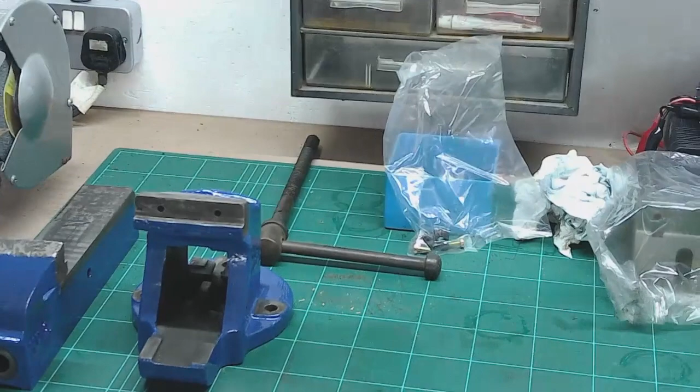So that's that. In other news, what I've been up to this week - the vise that you saw me strip into bits last week, that's now had 2 coats of the blue paint, so that's all ready to be reassembled really, other than I've still got to do something with the main screw and the shaft.

That just needs a bit of a wire brush and a clean up. So I might include some of that in this week's video in terms of just the rebuilding of that. I'm just leaving that at the moment because I want to get the second bench built first before I reassemble the vise, because as soon as I've got it reassembled I want to bolt it to the new bench.

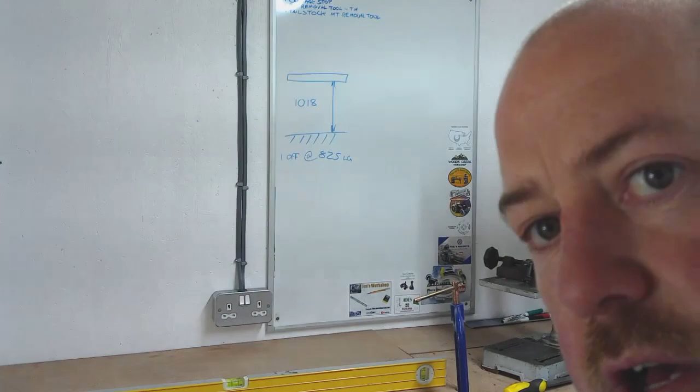I've taken some rough measurements on the board there that I'm working to, so we're ready to start that in a moment. So that's kind of updates of where we're at.

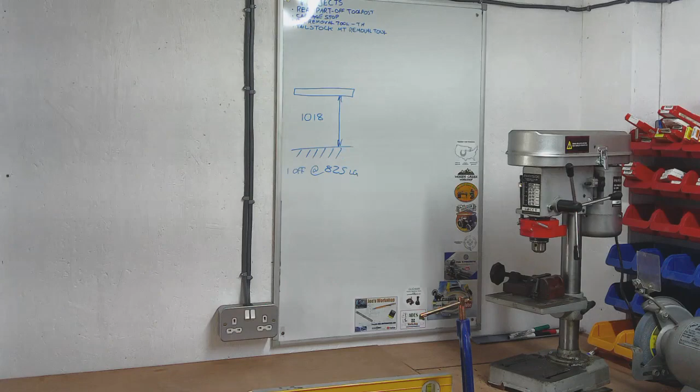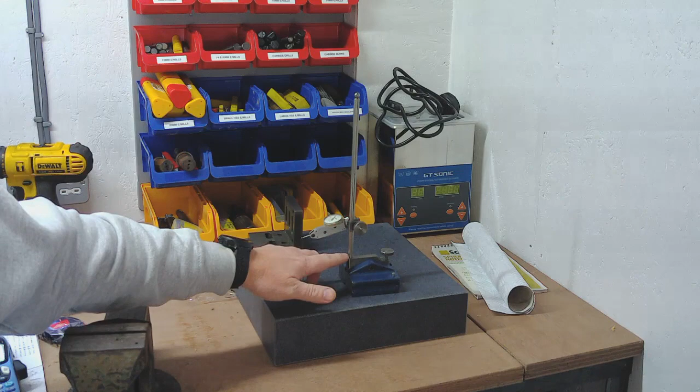The DTI stand or scribing block on the surface plate, I've actually fixed that, and I really wish I'd filmed it because it went incredibly well. It's a very simple job really, but basically I cut the end off the bar that was slack. I measured up the hole, it's pretty much 1/4 inch. It was slightly under, so I got a 1/4 inch reamer and just ran a reamer through, just by hand, a hand reamer. It took very little scraping out really, but it just sized it at 1/4 inch.

And then I've turned a 1/4 inch diameter on the bottom of the leg once I parted off the old piece that was undersized, and that's now a really good fit, really tight fit, but I can take it apart if I want to. And I've done some tests with the clock just on the top of this angle plate that I've got sitting on the surface plate here, and it's very good actually - very stable in both directions, so that tells me the joint's good. So that's all operational now, so I've got that to use.

I'll just spin you around and we'll go and have a quick look at the engraving machine, the work that I've been doing on that, and one of the issues I've come across with it, and some future plans with the engraving machine.

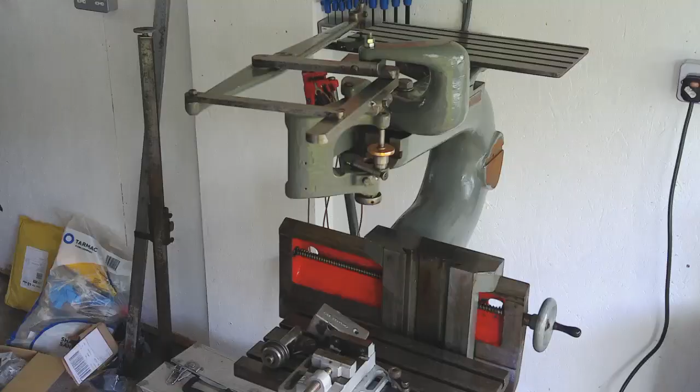Okay, so we're here at the Taylor Hobson. You'll see, hopefully it looks a lot cleaner than it did on previous videos. So I've been through and just given it a good wipe over, general wipe over all over it, taking off all of the old duck oil that actually looked like rust. I thought it was very rusty, but it was just brown duck oil basically where it had dried out, and the duck oil had done a really good job.

Once I'd wiped that off with a bit of degreaser, the actual steel surfaces underneath were very clean. So I've wiped all of the slideways, re-oiled them, got everything moving again, so it's all very, very nice, very easy to move. Sorry you can't see that, I'll move this one instead. So you can see there it's not taking a lot of force to move that.

It's all very smooth, and a lot of that's because of the work I did 4 or 5 years ago when I first bought this and completely stripped it, cleaned everything right up, did some stone work on the slideways. I didn't do any scraping, just generally gave it a really good thorough going over, then rebuilt it and repainted it, and it's in good condition.

One job I did have to do - I've never really used this thing, I cleaned it up and rebuilt it, but never used it in anger. I thought, now I've got it to this point and some room to move around it, we'll get it fixed up. So I got the rope attached to the motor and to the spindle, and we got it powered up.

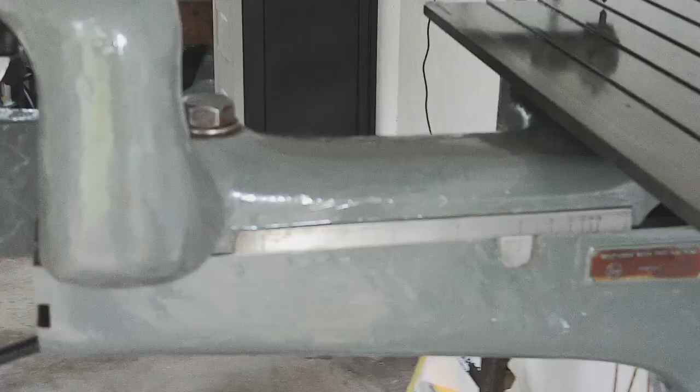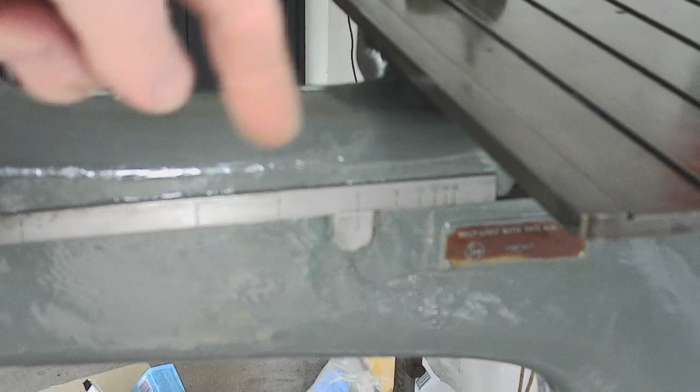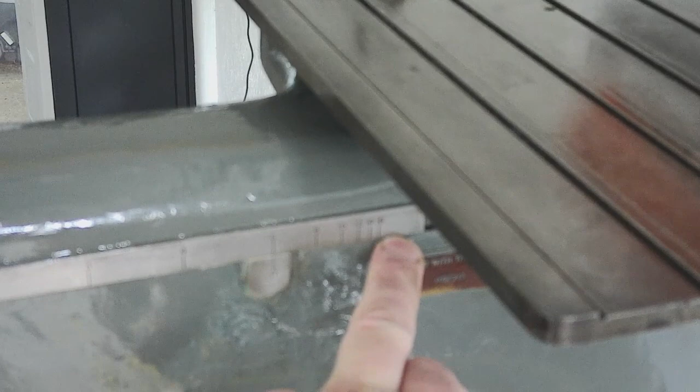You can see there the whole head unit will move backwards and forwards on the base casting, and you can just about see on here there's a series of markings, running from 2, 3, 4, and I think it goes 6, 8, 10, 12, 14, 16 - that's your ratio between what you've got on the copy plate up top and what you actually produce with the spindle and the cutter. So you set this to your desired ratio, and at the moment that's set on 6.

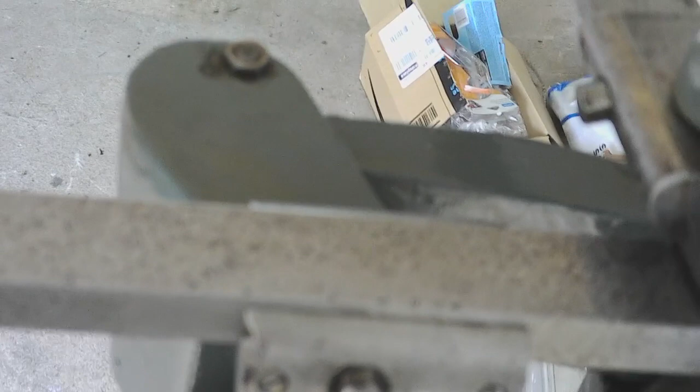You then set one of these bars on the parallelogram piece - there's a series of settings along here that have the same numbers on, so 2, 3, 4, 6, 8, 10, 12. You basically set the front edge of this piece to the same number that you've set on there, and then on the second arm of the parallelogram, this top one here, you have another set of the same numbers again.

Now you can generally see the state of this top bar, it's had much more corrosion. I would imagine at some point this has been stood where it's had water and moisture on top of it, and I really couldn't see any markings on there at all.

I really struggled, so I took it all apart, took it to the bench, got a magnifying glass out, and really went over it very carefully, and gradually, with a bit of Scotch-Brite and a lot of staring at it, I managed to suddenly see the numbers start to appear, and I could see where they were laid out. So what I've now done, and it's a bit rough and ready, and again the camera won't pick it up at all, I doubt - let me just turn the lights on at this end of the shop and see if that helps.

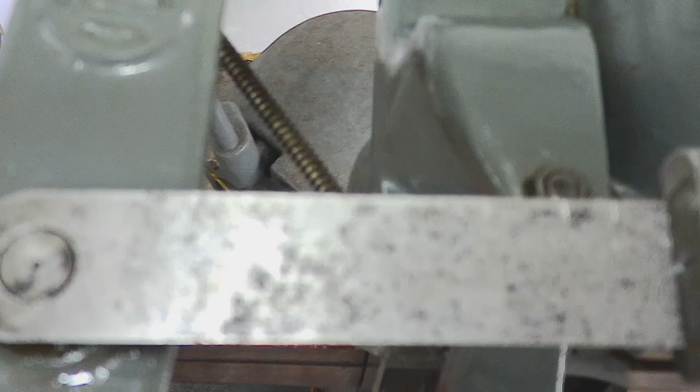It's probably going to make it worse actually, because there'll be a lot more reflection.

Anyway, what I've done is I've gone down, marked with a marker pen where the lines were, and actually gone in and scribed a line using my little Dremel and a burr. Then I got my stamp set out, went in next to the lines, and stamped all the numbers on that top plate, then given it a stone over to get rid of any high, raised edges. So now I can set it all up correctly.

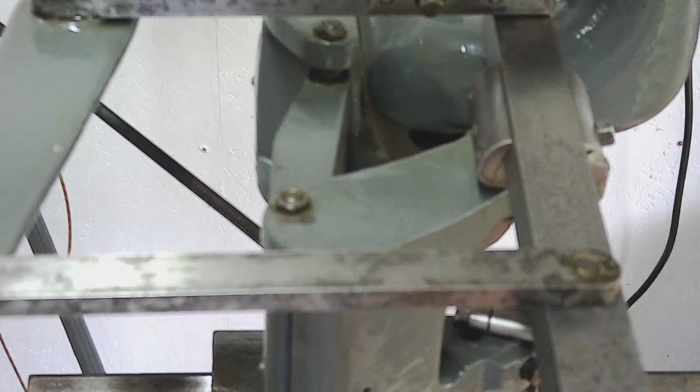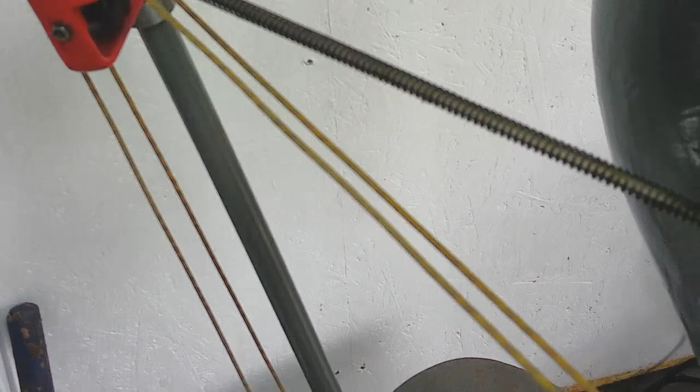So we set it all up, and you can see there, this is the rope that drives the spindle. This is where, when you pull this, it goes under the spring tension that keeps the rope tight so that it drives.

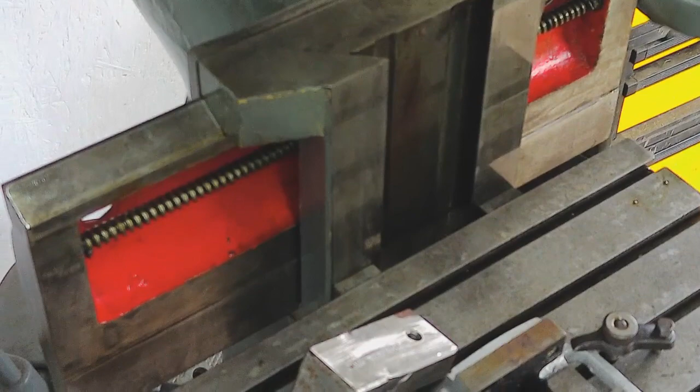So I got it all set up and just had a bit of a play. This is just a bit of a lump of steel that I found, and my camera's just not going to focus on that, but it actually says John's Workshop on it, just me having a play with the machine. The engraving's not very good at all, it's not regular, it just doesn't look neat or tidy. So I started investigating further, and I took the spindle unit out.

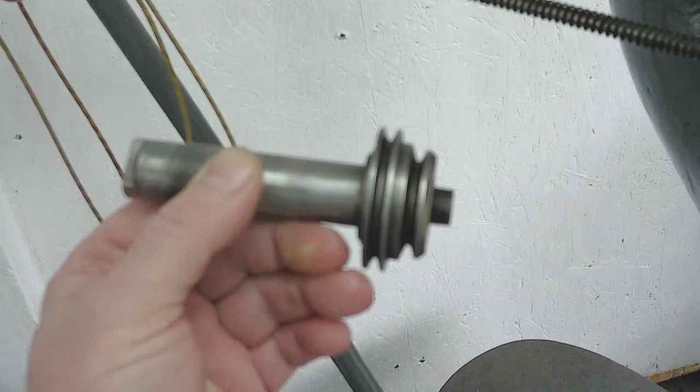So this is the Taylor, this is a Taylor Hobson unit, and basically your rope runs over the pulleys there. There's two pulleys, so you've got two speed options.

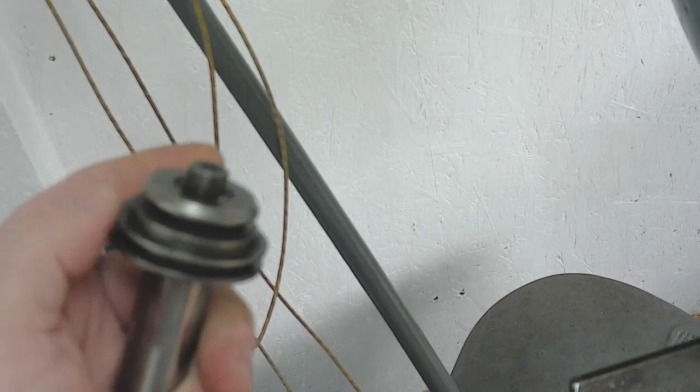But what was immediately apparent once I took this out, I managed to extract the bit that had been in there for a long time. So we got that out. But this thing's just rumbling and crunching and grinding, it's just the slack in it, and it's past its best. In fact, it's no good, it's no good for the machine.

So I've got a real issue now, because you can't buy these things anymore, or to the best of my research, I'm struggling to find anything. There's the odd one or two on eBay every now and again, but they're probably in a similar state to this. They're 60, 70 years old, these things.

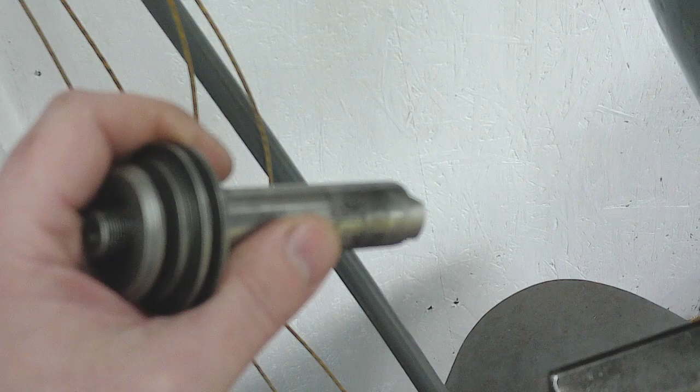I'm really not sure what to do. There is a refurb service, and I've looked at the cost of having one of these things sent away and refurbed, and it's about 3 times the price of what I paid for the whole machine. So it doesn't make financial sense really to spend that sort of money at the moment, especially because I don't really plan using this thing very often.

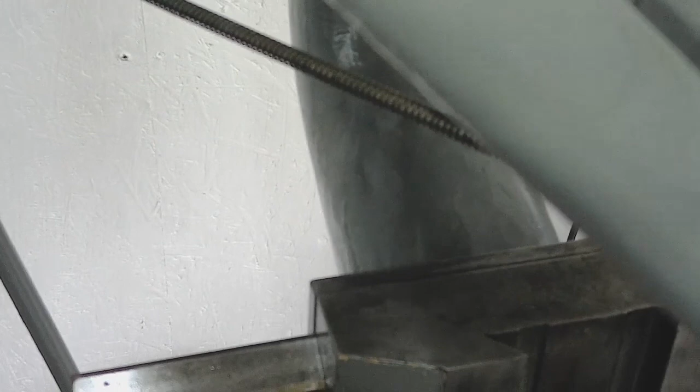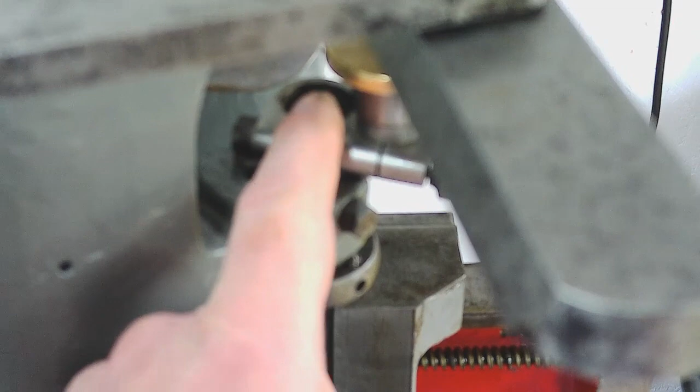So it's all kind of at a standstill at the moment. But my thinking is - apologies for the handheld - if you look just here, this bore here is where that spindle sits. It sits in through the bottom up there. So what I may do is turn a diameter eventually that's a good fit in here.

It's just a plain bit of bar that will just sit in there nicely, but I'll turn it longer so it sticks out the top by about 30mm, whatever, and out the bottom by a similar distance, and then create 2 brackets. Once I've got the mill, I'll be able to do that much better, move off to the back, so I've got a bore the size of this spindle diameter, and then another bore further back, as close to the head unit as I can get it, then bore this second bore out on both plates to hold a DC motor or something similar.

You can buy them online for engraving machines, basically a DC motor with an ER11 front end on it with collets. That's my kind of thinking. That's all doable, it would make a decent project as well to film, and it's probably the cheapest way of me putting this unit back to a condition where I can use it and get over the issue that I've got with the worn out spindle unit.

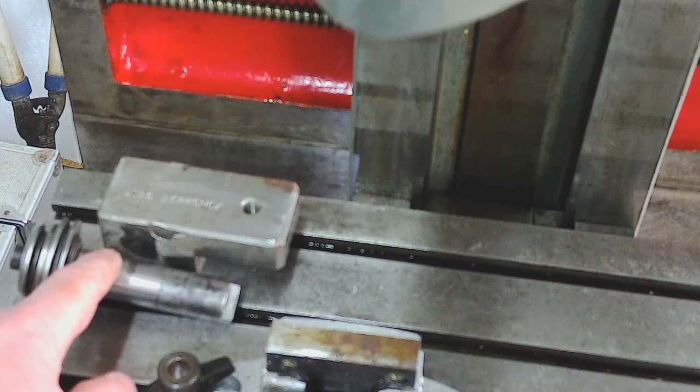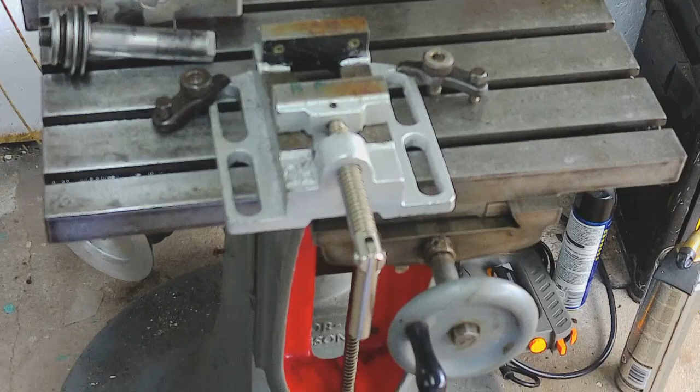So that's just a bit of an update really, guys, of what I've been doing. But it's nice to see the whole machine looking decent again. I've still got the bottom end to clean up, but that's just superficial, it's the paintwork on the outside. All of the slideways and steel work and everything's all nice and clean.

So that's a bit of an update on the engraving machine. You'll probably have seen at the back there, I've put my Allen key sets up on the wall. So gradually it's still starting to unpack things and get them screwed up onto the wall. So I'll leave it at that point now, and I'll probably bring you back with a time lapse as we're finishing the bench off.

One more quick update, guys. I've dragged out of the shed next door my pallet truck, from under boxes and various other things.

So that's sitting in here ready to go for when the mill arrives, just to get the thing into the garage, and then may end up having to use this in some form or another as part of the lifts. We'll see how we get on with the crane, but there might be bits of the build where I need some hydraulic lifting, and obviously the pallet truck can be used for that.

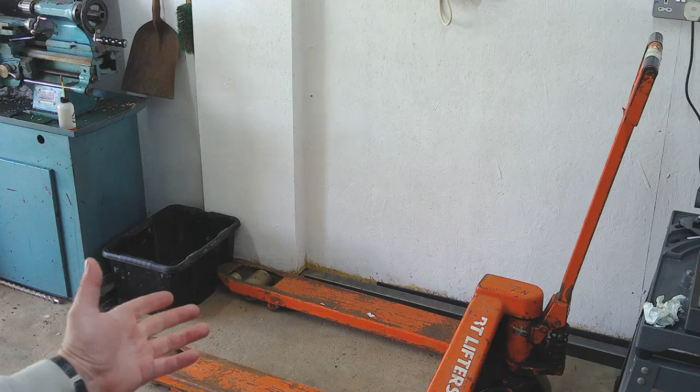So I'm going to need some big lumps of timber, and I've got some breeze blocks and various other things that we'll be able to use to pack up on top of the tines, and gradually start lifting things up. We may need to do it that way, or I may be able to use the crane. All of that will become evident once we get everything in and I start planning the build.

So that's in here ready to go, just in case when it's delivered it's pouring with rain. I'm ready to go now. We can just get the door open, get this thing outside, get underneath it, wheel it into the shop at least so it's out of the weather, and then at that point I'll do everything else on video and bring you along on that journey.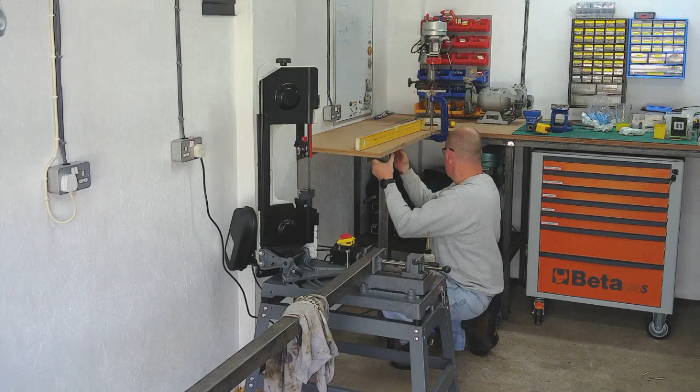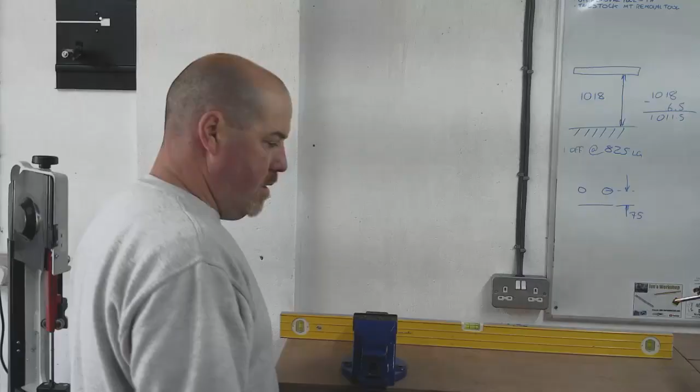Right guys, well I'm back, I've just cut the steelwork off, roughly positioned it in place. I think this is where it's going to go. I'm just going to go for the one steel leg, which you can't see, apologies. Let me just pan down a bit so you can see what I'm doing.

There you go. So there's one steel leg, 50 by 50 box section. Underneath there, running the full length of the bench, is a piece of angle iron that sits just on top of the 50 by 50 box. And then right down at the floor, and it's only loosely kicked in at the minute, is another piece of angle iron there. So it's all at the right height. The bench is level at that, so I'm happy with that.

What I'm going to do is put the angle iron back, and I don't know whether you saw in the slow motion, I just took a measurement at the bottom there of 75mm from the front of the bench in to where the holes for the vise will need to go. So I'm going to pre-drill two holes in the angle iron under here at the hole centres for the vise, and then I'm going to weld all of this together.

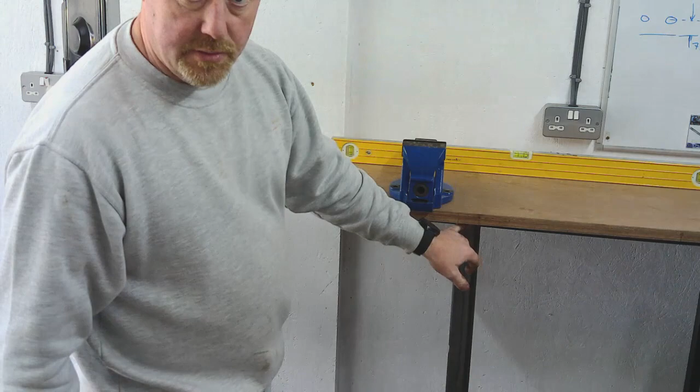So I'm going to weld the box section to the angle iron, and weld the angle iron piece at the bottom there to the bottom, centrally about the box section. I'll pre-drill two holes in the bottom piece of angle iron as well, so I can bolt that to the floor. The idea being that when I bolt this vise to the bench, it bolts through the vise, through the timber, and through the angle iron piece underneath as well, just as a bit of extra. It won't need it because this bench top's very robust anyway, but it will just mean everything's really solid. So that's the plan.

That's where the vise is going to go, and then I'll have the grinder sitting on here as well, and if there's room I might even pull the pillar drill round onto this portion of the bench as well. We'll see. So that's the plan.

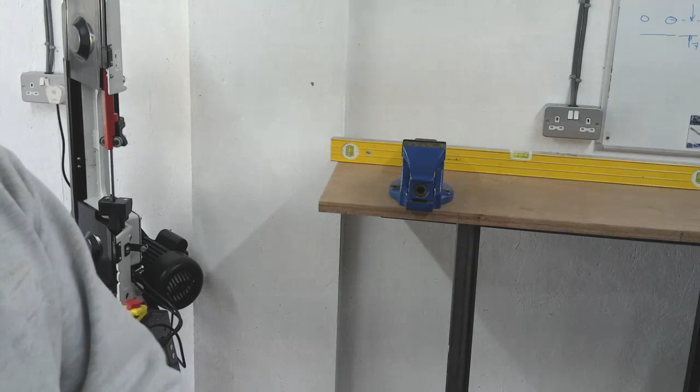And then what I'll finally do when I've got everything together, right underneath the main bench, in this corner where I've got the clamp at the minute, I'll weld the angle iron piece so that's butted up to the angle iron of the main bench, and I'll just weld that angle iron to the main bench framework under there, and then that will make a very rigid addition to the bench.

So I'm just going to stick the camera back on charge. It's about out of battery now, but hopefully from where it's charging I'll stick it onto a time lapse, and you'll be able to follow along with what I'm doing.

Just a quick tip, guys, for anybody who doesn't know, for a situation like this I need to know what the hole centres are for the vise, to drill the holes through the steelwork that's going to go under the bench. These holes are fairly irregular, they're cast holes, not round holes. There's many different ways to get hole centres by different methods.

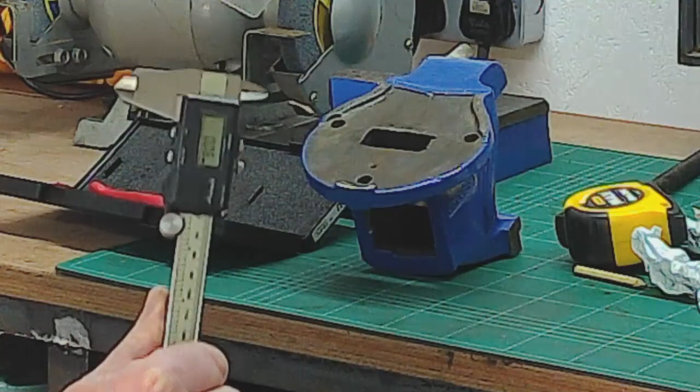But when the holes are irregular like they are in this, the best way I've always found to do it is very simple. You need a vernier, and you use both sides of it, the inside and outside versions. So the easiest way is just to measure your extremities until you get your biggest result, and we've got 121.3.

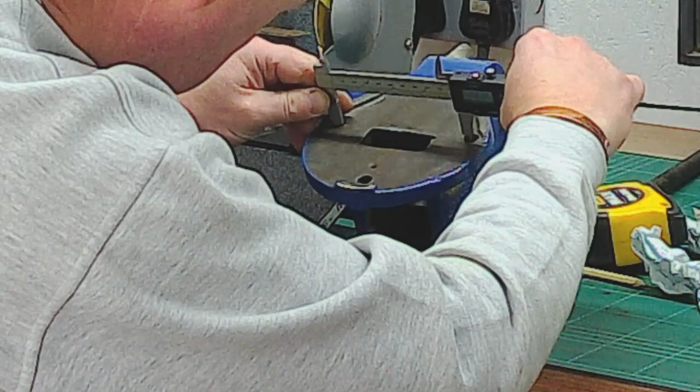So I'm just going to write that on the whiteboard, which you won't be able to see, and then you measure the smallest dimension, 98.75. Okay, I'll just go up to the whiteboard, bear with me a minute.

Okay, so take two of the measurements. We're just going to add these two numbers together now. So I've written down the widest and the narrowest points, just going to add those together. Apologies you can't see: 7 and 3 is 10, 8 and 1 is 9 and 1 is 10, 9 and 2 is 11 and 1 is 12, and 2. So we've got 220.05.

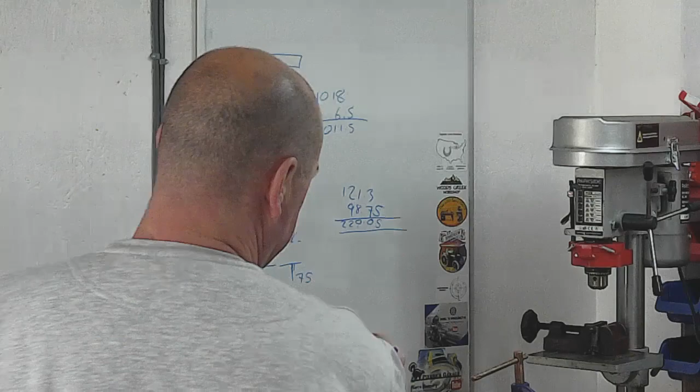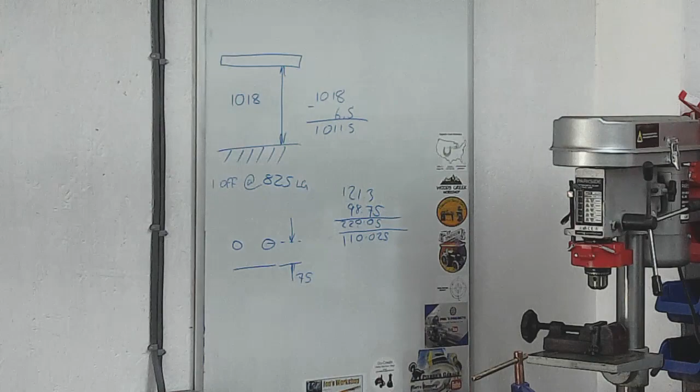And then you divide that value by 2, which is going to give us 110.025. We'll ignore the 0.025 based on the hole sizes, so it's 110mm hole centres.

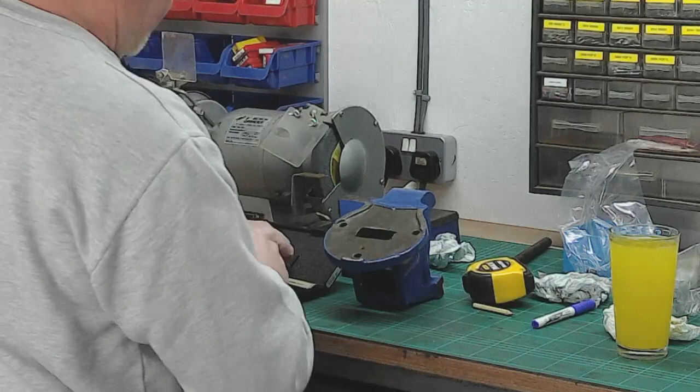So I'm just going to flip back to the device, and we'll just double check that with the vernier. So it's 110mm, so if we set that to 110, and that's bang on. So that's an easy way, a very simple way, especially when you've got irregular shaped holes like cast holes that aren't perfectly round.

That's the easiest and best way of determining the hole centres. So I'll use that value to mark out the steelwork now, and I can drill the holes in the steelwork to accept the bolts underneath the bench.

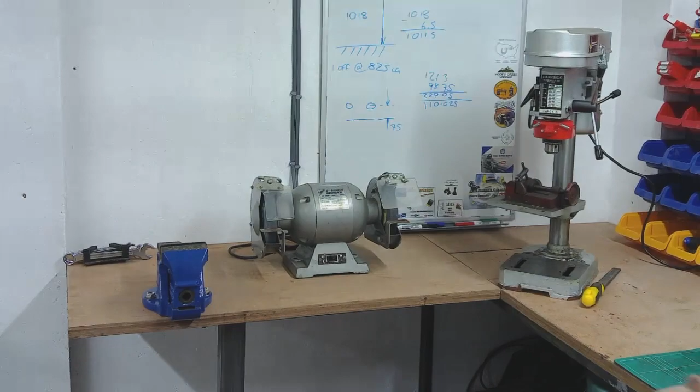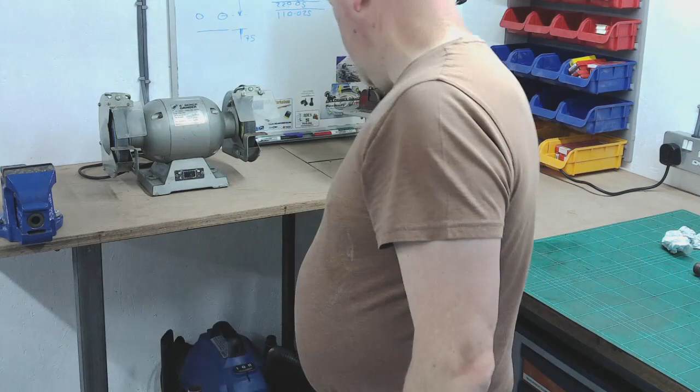It's absolutely solid, which is what I wanted. Space underneath for the shop vac, so I finally found a space for that to go, so that's sitting underneath the bench there now. The pillars are bolted to the floor, so that's solid, and the beam underneath is welded to the bench, and I think I did a bit of time lapse of that as I was welding.

So I've just loosely thrown the vise together, and tomorrow I shall come out, rebuild the vise fully, and also finish off the lathe tailstock Morse Taper attachment. So what I did off camera, and I did this in the week, I'll show you the bits and pieces. There's this piece of mild steel, black mild steel with a tiny hole in each end, that's for a split pin.

The idea behind that came with the saw, and that was the axle for the wheels to run on, which I'm never going to use. So we're going to cut this down to a shorter length.

I've made this adapter, which is just a piece of unknownium. It was quite hard stuff, I don't know what it was, but it's just something I got in the scrapping. I've drilled a clearance hole for a 5mm bolt straight through it. I've counterbored for a 5mm cap head at one end, and at the other end I've bored it out 10mm, which is the diameter of this bar.

So that'll sit on there, it'll need threading in the end of here, and the cap head will then go through and attach to there. That flat face on the top there, this diameter has been turned to fit just down the bore of the tailstock, so it's a good fit in the tailstock. So this flat face here is the face that will do the hammering on the back of the Morse Taper to eject it.

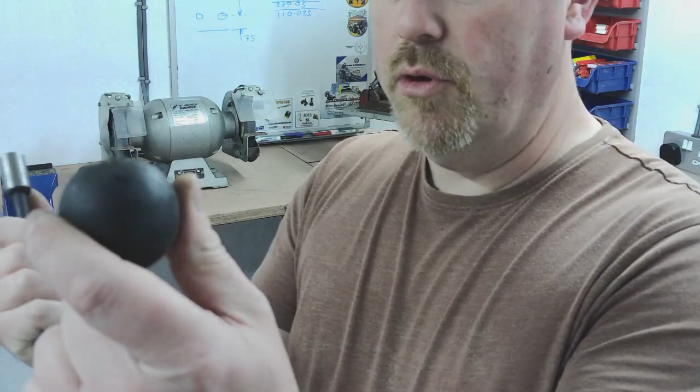And then at the other end I shall cut it to the right length, and I've got a black rubber ball that was part of the engraving machine that's never going to get used. So again, at that end, what I shall do is sink that cap head properly into the ball.

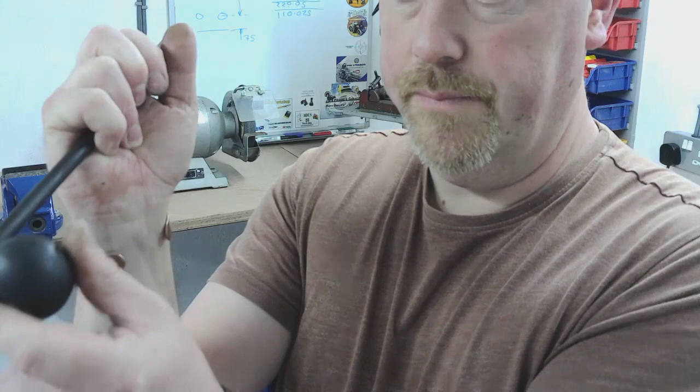And then at the other end I shall bore that out 10mm, and I shall drill and tap the other end of this black piece of bar at the right length, and screw the ball on at that end, and then I shall have something that's nice to hold in the hand, and that will slide up the back of the tailstock and just eject the Morse Taper.

So that's the idea behind that, and I'm just using what I've got rather than making anything special or buying anything in. I'm just using the bits and pieces. So that's a small job for tomorrow.

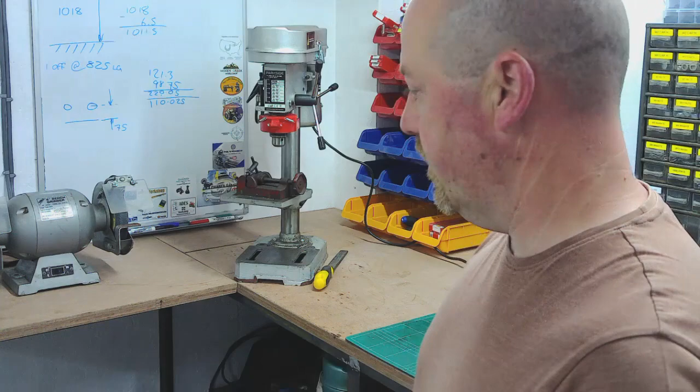So yeah, I'm pleased with the bench. It's looking good. It's given me a bit more room at the drill, because it's in this corner area now. There's a bit more access, the drill's easy to get to. Grinder's up on the bench, vice at the bench that end. So it's coming together, and I'm pleased with just the general rigidity of that. That's got no movement in it at all. It's absolutely solid. So that's gone well.

So I'll bring you back tomorrow when we're finishing off the tailstock, Morse Taper remover, and just a bit more of a general tidy up.

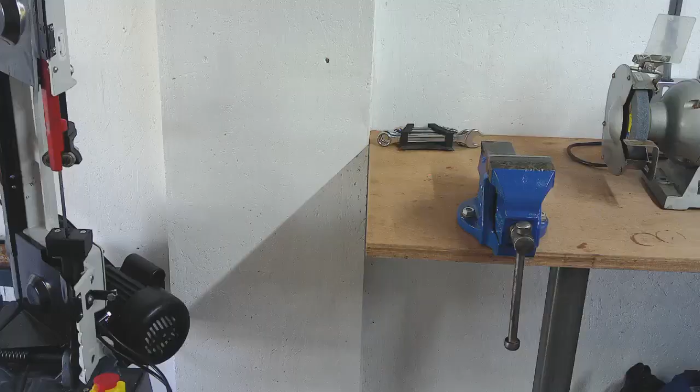Well, that's the vise put back together, guys. That's all back together, and I've not... it's had a paint, but you'll see some people that have done a thorough restoration and taken all the little marks out of it and polished everything up to the nth degree. This is a working vise. I don't want to spend that length of time and effort on it and then not want to use it.

So that's all been put back together. It's had a good oil up, good grease on the threads. It's all been cleaned. I've given the handle and the shaft end a bit of a wire brush just to get the worst of the rust off and oil up, so it's clean. And that's it, all fully operational and fixed to the bench, nice and tight. And you can see there, the bench just doesn't matter what I do, the bench isn't moving anywhere. So that's what I wanted, something nice and strong.

So that's that one done, and we'll focus in on the other one until such point as the mill arrives, I guess.

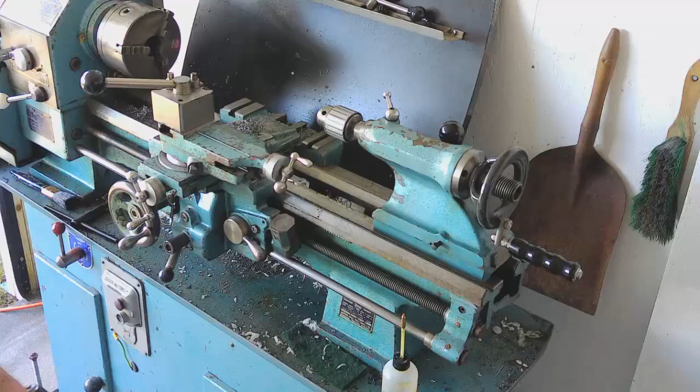Nice. Well, that's the tailstock Morse Taper sleeve removal tool finished. It's not pretty, but it's just using the bits and pieces I've got laying around. That's a good fit down the back of the tailstock there, and that removes the chuck nicely.

That's another job done. I'll just spin you around, I'll go the other end.

So I think that'll be the end of this episode. It's gone on, it's quite a long episode actually, there's quite a lot that I've tried to cover. I think in future episodes I might try and split that down just to be a bit more focused. If anybody's interested, let me know in the comments.

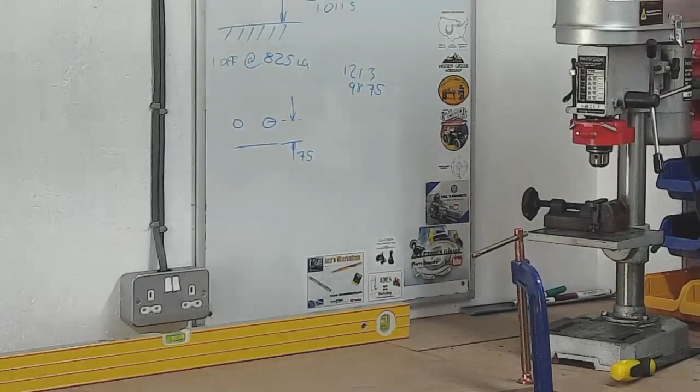So then you just add those two numbers together. I'll start again. Right, 5, that's 10, 8 and 1 is 9, plus 1 is 10, 9, 11. So we've got 210.05, and then you divide that by 2, which is going to give you 100... 105, sorry, I'm really not prepared this well, 105.05, so 105 millimetres basically. So that's the hole centre size based on those holes. Very simple: measure the longest... well, it would be simple if you could do maths, which I obviously can't today. So you measure the outside that way, you measure the inside that way, add the two results together, divide them by 2, and that will give you the perfect hole centres regardless of what shape and sizes the holes are.